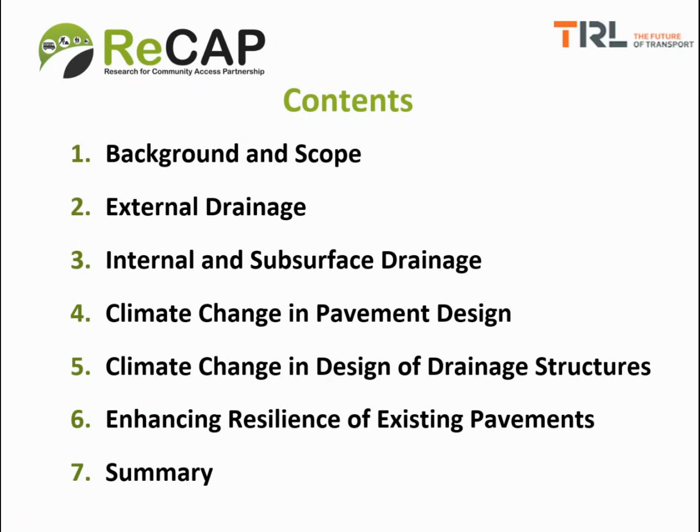Now, most low volume roads are constructed from natural, often unprocessed materials, which tend to be moisture sensitive. This places extra emphasis on drainage and moisture control for achieving satisfactory pavement life. Moisture is the single most important factor affecting the long-term performance of pavements. Thus, it is one of the most significant challenges faced by the designer, and the designer must provide a pavement structure in which the detrimental effects of moisture are mitigated to acceptable limits in relation to the traffic loading.

The purpose of this chapter is to provide an overview of the key aspects of drainage and climate resilience that must be considered in order to provide a robust pavement that will be able to perform its function sustainably. The chapter does not cover detailed hydrology and drainage design. For those, you can look into your respective country manuals.

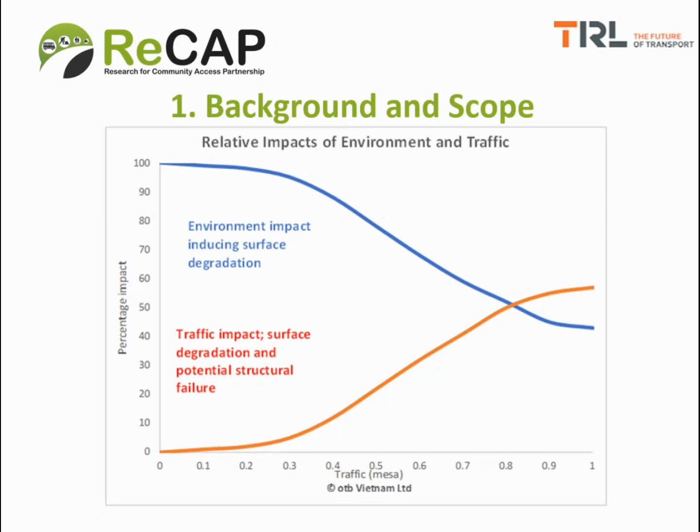Now, moving on to external drainage. The role of external drainage is to keep water away from the road. It therefore includes aspects or elements such as drainage ditches, culverts, surfacings, shoulders, and the road cross-section, and to some extent, the road alignment.

Water can ingress into the pavement layers through, one, the surfacing. Over time, oxidative hardening of bituminous layers and cracking of the surface allow water to get into the lower pavement layers. For modular pavements, water can ingress through the joints between the modules, and for concrete through the cracks in the concrete. Now, when this water gets in, it weakens the top areas, which are also the high traffic stress zones, and therefore damage becomes rapid and easily manifested.

The second way in which water can ingress into the pavement is through unsealed shoulders. Water easily penetrates and weakens material below the wheel paths, which are again the high stress zones of the pavement layer.

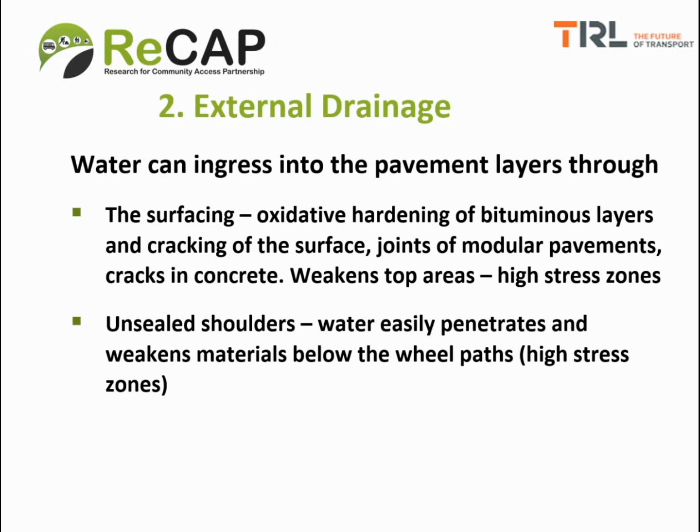The methods of water ingress into the pavement that we've discussed also apply to unsealed roads. The difference is that for unsealed roads, there's a wider surfacing which would allow more water to get in through the surfacing, and this can be counteracted by having an adequate crossfall or camber of 4 to 6%.

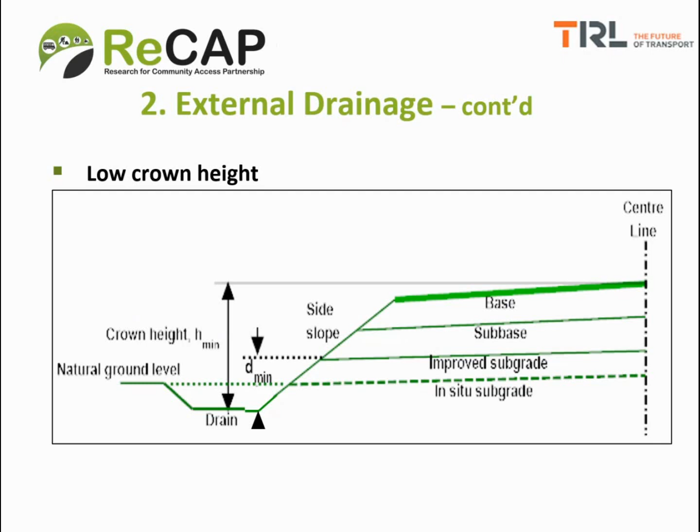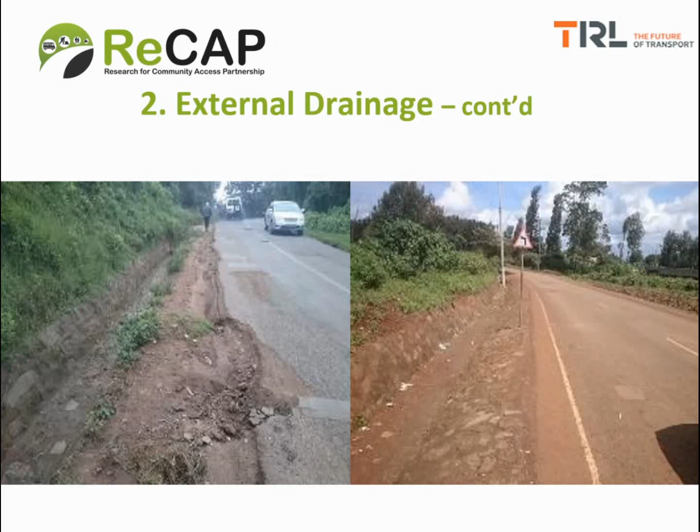Now, how can we prevent water from entering the pavement structure? We can do this through timely maintenance of rejuvenation seals or through reseals so that the edge hardening and cracking does not occur on bituminous sealed roads. We can prevent ingress of moisture from the pavement edges by sealing the shoulders and by raising the embankment.

We can also make use of impermeable seals such as Otta seals and Cape seals. And we have to ensure an adequate crown height and invert depth as described earlier. Now, in some cases where you're doing work in retrospect to preserve a pavement, you may have to use dense graded materials on the shoulders to make sure that the ingress of water does not affect the pavement.

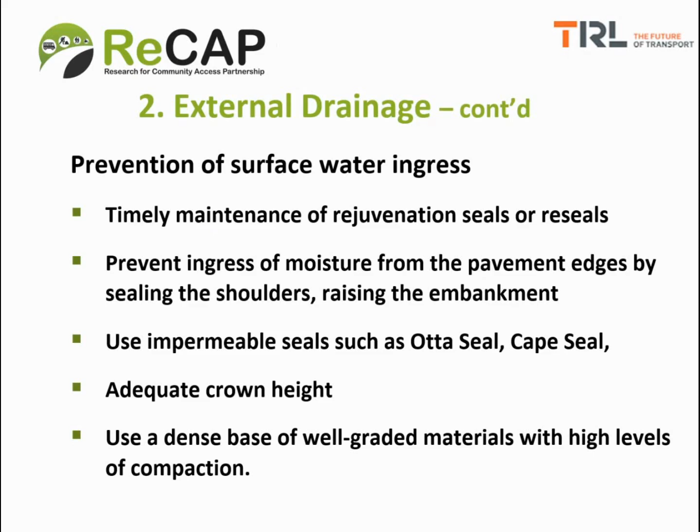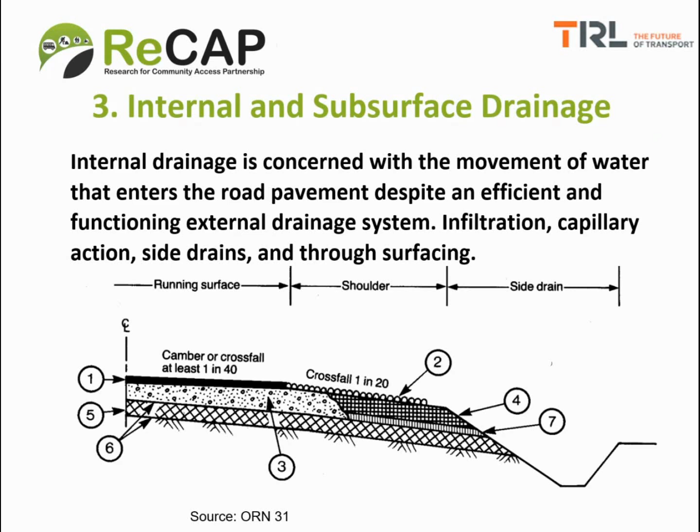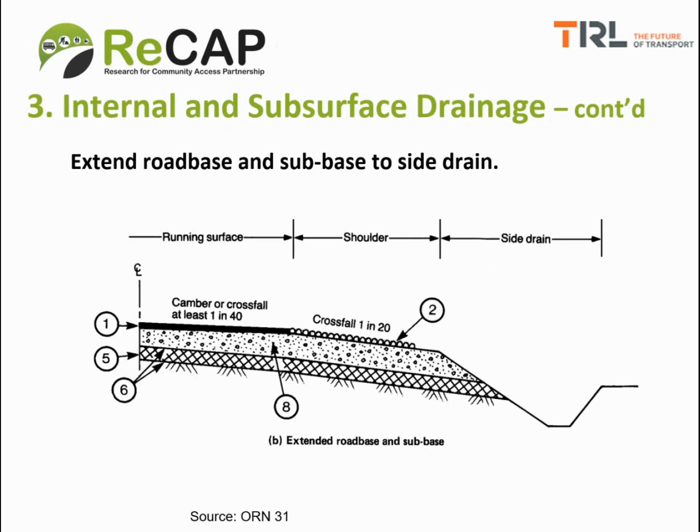Now, the best approach to avoid the boxed-in type of pavement construction is to use road bases and sub-bases that extend right up to the edge of the side drain as illustrated in this figure. Note also that the shoulders are still sealed, as we often advise. Now, we have to look into aspects of improving internal drainage so that all the detrimental effects of moisture migration into the pavement layers can be minimized.

Now, I have to describe here something known as permeability inversion. Permeability inversion occurs when the permeability of the pavement and subgrade layers decreases with depth. Under infiltration of rainwater, there is potential for moisture accumulation at the interface of the layers. The creation of such a perched water table often leads to rapid lateral wetting under the seal. This may lead to base or sub-base saturation in the outer wheel track and result in catastrophic failure.

A permeability inversion will often occur at the interface between the sub-base and the subgrade because most subgrades are cohesive and relatively impermeable fine-grained materials. Preventing permeability inversion can be achieved by ensuring that the permeability of the pavement and subgrade layers are at least equal or increasing with depth. For example, the permeability of the road base should be less than or equal to the permeability of the subbase in a three-layered system.

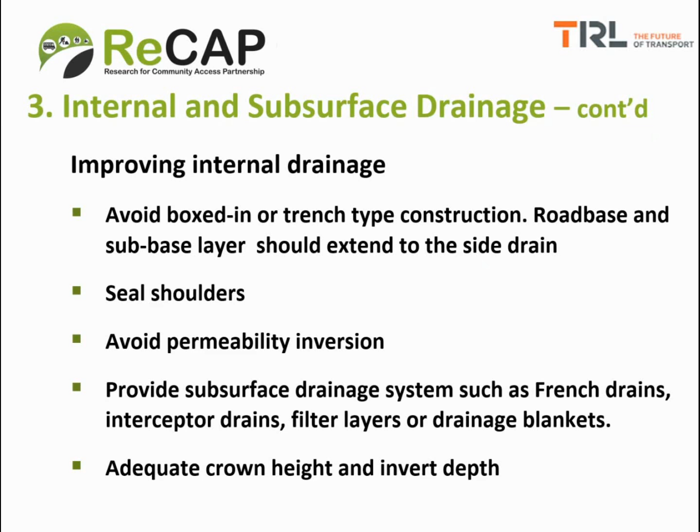And therefore, the best approaches at improving internal drainage include avoiding the boxed-in type of construction by ensuring your road base and subbase layers extend to the side drain, using sealed shoulders, avoiding permeability inversion as I've discussed earlier, and where all other approaches cannot be applied, you should consider providing subsurface drainage systems such as French drains, interceptor drains, filter layers, or drainage blankets, and of course assuring adequate crown height and invert depth.

We shall now look at climate change in pavement design. Road engineers are accustomed to designing infrastructure for a specific type of climate, but the climate they're designing for is no longer fixed. The climate is changing, which means basing designs on historic patterns and averages is no longer sufficient. Information on the future climate needs to be taken into account.

The exact type and magnitude of future changes will vary by geographic region and with the amount of global greenhouse gas emissions. Now, the climatic changes that are already occurring are precipitation, which is more likely to fall as more intense rainfall events. We are also witnessing changes in the timing of the wet and dry seasons. There is less precipitation in some areas and more in others.

There is also sea level rise, and this will affect countries that have got several roads, including low volume roads, that run close to coastlines. There are also areas which experience greater periods of drought. And then there are also higher average annual temperatures and higher maximum temperatures. There are more frequent and intense heat waves in other parts of the world.

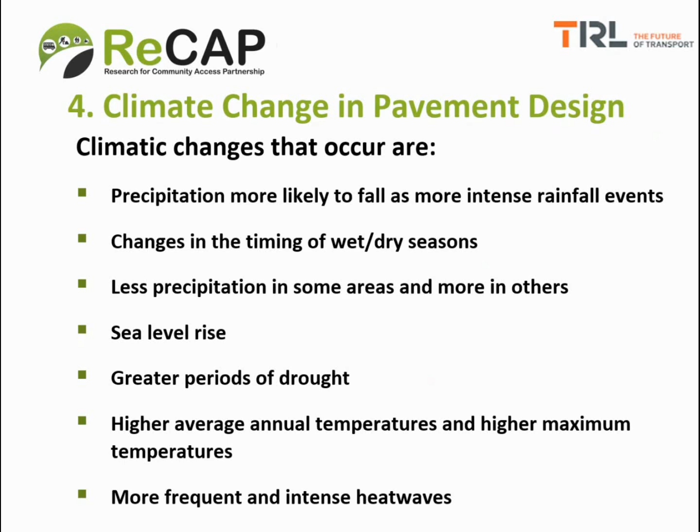Now, how can we integrate climate change into road design? We can do this through early assessment of climatic change in the design process. This means we should engage engineers, climate scientists, geologists, hydrologists, and stakeholders at the planning stages before we undertake our projects. We should also design for future flexibility, for example, by leaving extra space for future drainage structures.

We can also improve our rehabilitation designs. For example, certain sections of road or structures that fail can be replaced with more resilient ones during rehabilitation of the various roads. We can also include adaptation measures as part of routine maintenance. For example, every year you could replace some culverts on your roads with much bigger ones or with others that are more securely anchored.

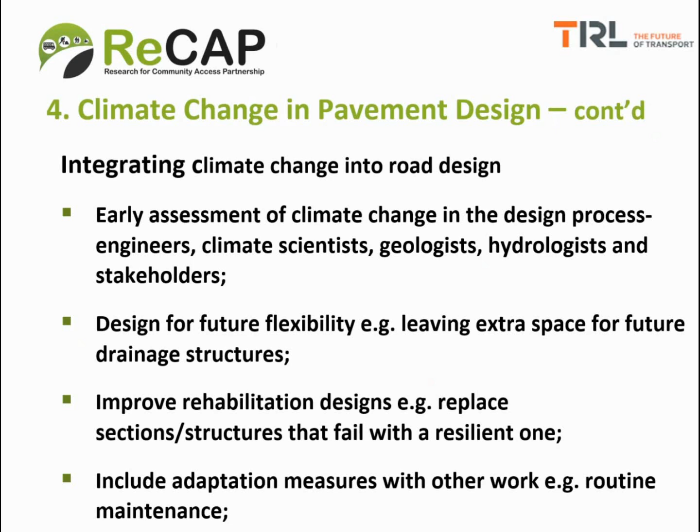We can also select more robust materials for sections at risk. For example, we can use crushed rock as road base in sections that are likely to flood and thus cause weakening of the road base materials if the natural materials with high plasticity were to be used. We can also review our design standards. For example, the crossfall and camber of our roads can be revised from 3% to 4% as a minimum. We can also review our material specifications and learn from the roads that would have survived extreme events.

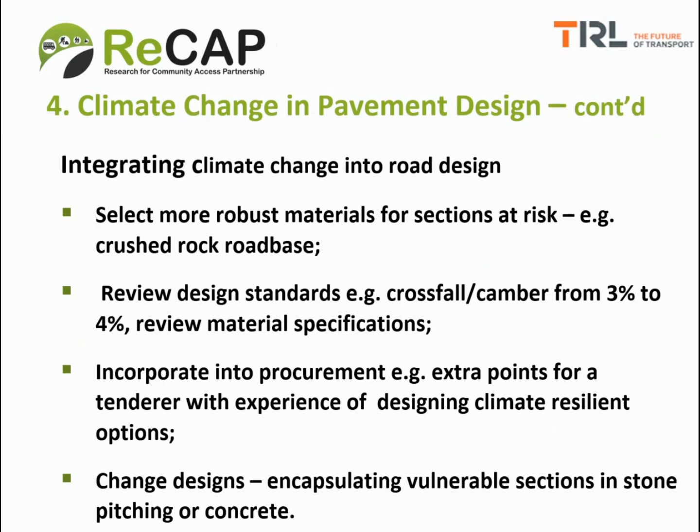We can incorporate climate change into road design at the procurement stage. That is, a tenderer who shows experience of designing climate resilient options can be given extra points. We can also change designs, for example, by encapsulating vulnerable road sections with stone pitching or with concrete.

We now move into climate change in design of drainage structures. Integrating climate change into design of drainage structures can be carried out through increasing the width of drains, e.g. from a minimum of 500 millimeters to 1,000 millimeters. We can also reduce the spacing of drainage structures such as mitre or turnout drains to divert water away from the roads. But bear in mind that in many countries, you'll face a lot of opposition if you try to create mitre drains that turn out into people's farms or into people's compounds.

We can also use appropriate storm or flood return periods for high-risk areas. For example, we can use a 50-year return period for areas or structures where we have been using a 25-year return period. Now, I must point out here that a 50-year return period does not mean that it will take 50 years for the storm to occur. You can experience a 50-year return storm almost twice in, say, 10 years, as countries like Mozambique have seen recently, having received massive cyclones within the last 10 years. So a storm return period simply means the probability of the storm occurring in terms of years.

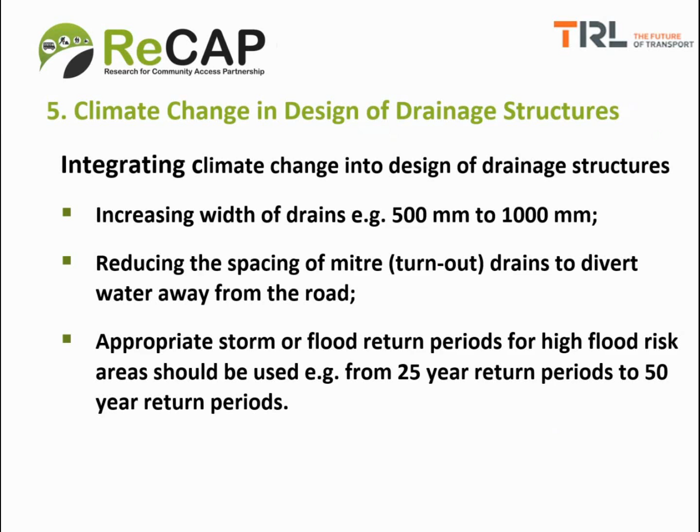Now, we can also integrate climate change into drainage structures by the use of monolithic structures. Monolithic or composite structures consist of a single unit rather than discrete structural units. Monolithic structures include box culverts, causeways, and others.

Non-monolithic structures include bridges and culverts with discrete elements. For example, a bridge normally consists of structural elements such as abutments, piers, and decks. These are not connected. They provide support discretely, but it is relatively easy for each element to be washed away or displaced. E.g., the bridge deck can be lifted or the pier can be washed away. These failures do not require much force to occur, but for monolithic structures, much greater force is required for their failure to happen or for them to be washed away.

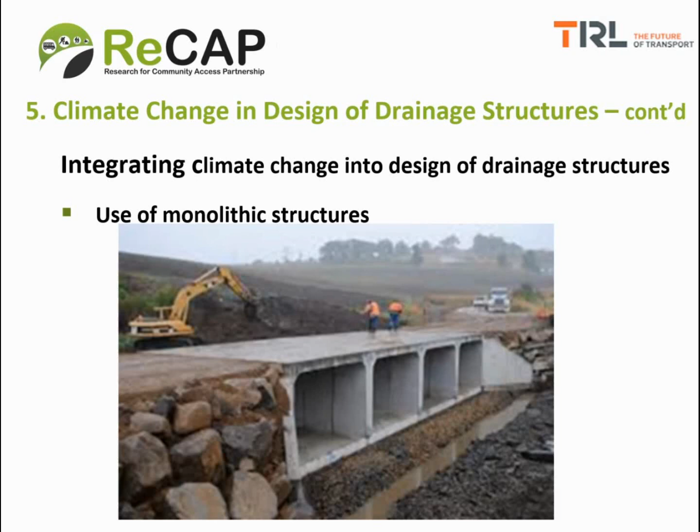Another example of a 4-outlet monolithic structure or box culvert is shown here. Once again, you can see that the probability of this structure being washed away is quite low, and if it were washed away, it would move only a few meters away and can be easily restored.

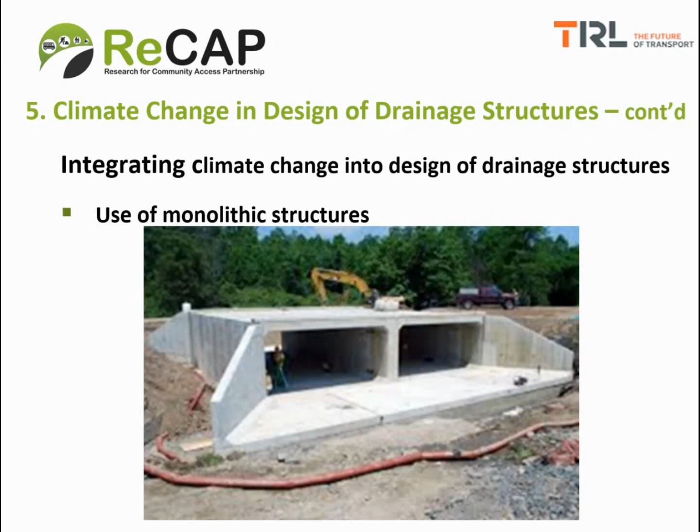We now look at enhancing climate resilience of existing pavements. In some cases where your pavement design may be upgrading an existing road into one of a higher standard, you may already witness certain effects of the climate change on your road sections or on some of your drainage structures.

Now, you need to carry out a vulnerability risk assessment of the infrastructure before you embark on any actions. And you do this by evaluating the condition of the infrastructure. For example, for drainage structures, you can see whether wing walls are being damaged or erosions are occurring at the toes of various structures. For road sections, you can see whether the edges of the pavement are being eaten away or washed away.

And the second assessment that you need to carry out is that of the road environment, to evaluate which sections are at risk of, for example, overtopping. Now, you may need to consult topographic, climatic, and soil maps to be able to tell which areas are at high risk or which sections or structures are at high risk. A key aspect in this assessment involves the assessment of land use.

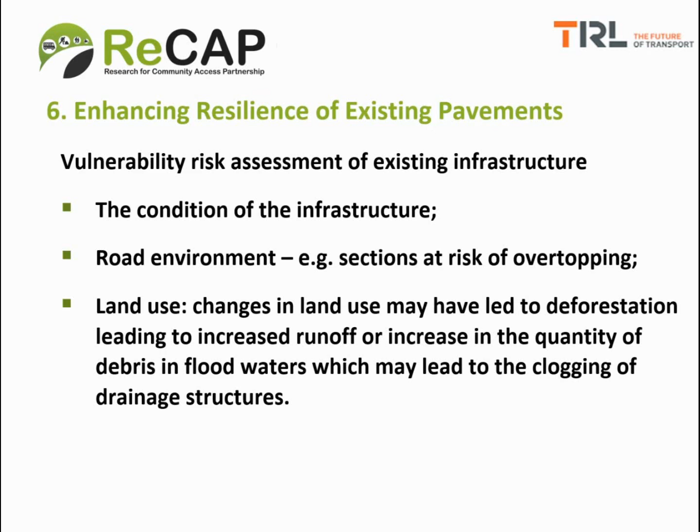Changes in land use may lead to deforestation, which leads to increased runoff and increase in the quantity of debris in flood waters, which may lead to clogging of drainage structures. And once the drainage structures are clogged, you expect that the water then starts affecting the pavement structure as well.

Another approach is to carry out monitoring of existing infrastructure. With modern technology, you may actually be able to capture footage of infrastructure as and when they fail. And assessing the mode in which the failure occurs helps you to determine the most appropriate interventions required to improve the resilience of other similar road infrastructure.

Now, you may also need to carry out forecasting for climate change. Thankfully, these days, the models for forecasting are becoming more easily available. And under the RECAP program, some forecast maps for parts of Africa have been produced. You can get this from the RECAP website.

Now, you may also need to take very careful records of the condition of the existing infrastructure and data related to storm intensities, because the severity of the storm will most probably be manifested in terms of its intensity. And knowing the intensity allows you to design drainage structures adequately. In most cases, we get records from weather stations that simply report the monthly rainfall if you're lucky, and in most cases, the annual rainfall, but the intensity is often missing, and that is what you need for design purposes.

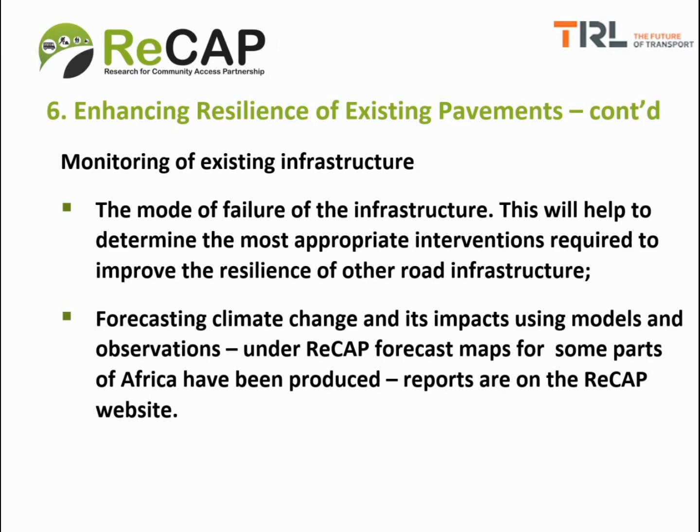Now, in summary, we can see that to ensure good drainage and climate resilience and longevity of road infrastructure, you must consider sealing shoulders for any pavements that you provide, providing adequate crown height and invert depth for your pavement that you will design. You should carry out or program the resealing of roads in a timely manner.

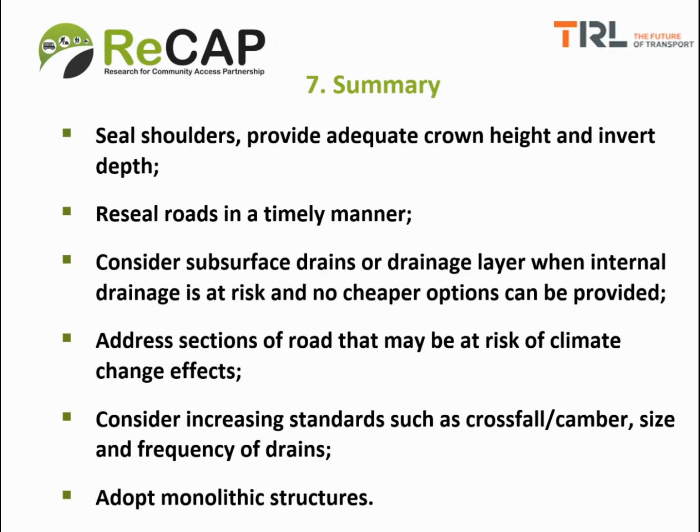You should consider the use of subsurface drains or drainage layers when internal drainage is at risk and no cheaper options can be provided. You need to attend to road sections that may be at risk of climate change effects. You should also consider increasing standards such as crossfall camber, the size and the frequency of your drainage structures, and consider the use of monolithic drainage structures.